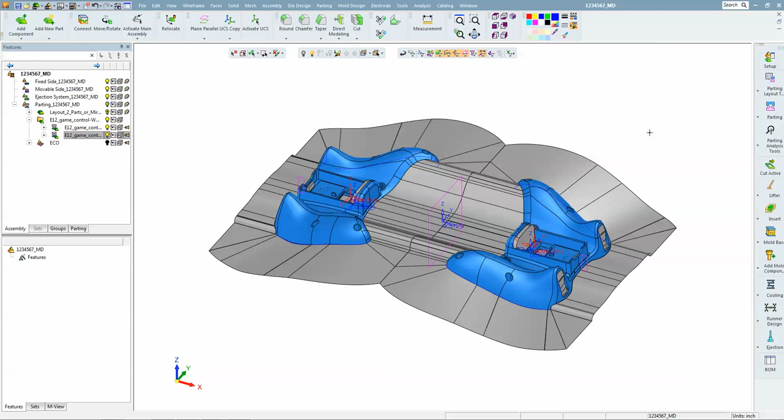Okay, in the last video we did quick split on these parts and we developed the shutoffs.

Now we're ready to add a mold base and some inserts. So we're going to go to mold design and choose new mold base.

I'm going to set the directory here, what catalog I want to use. Alright, we're going to do PCS.

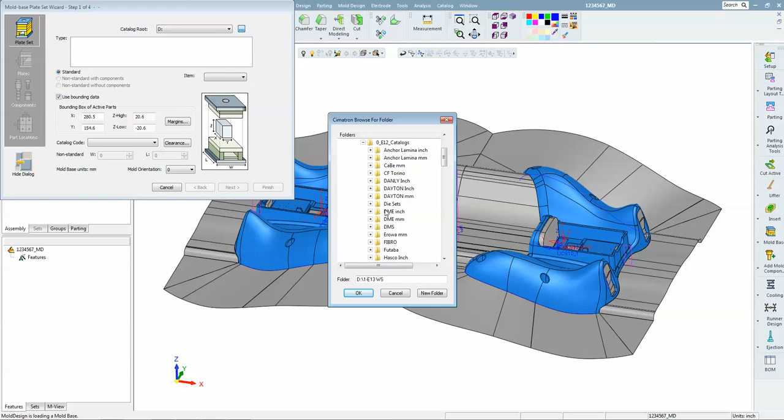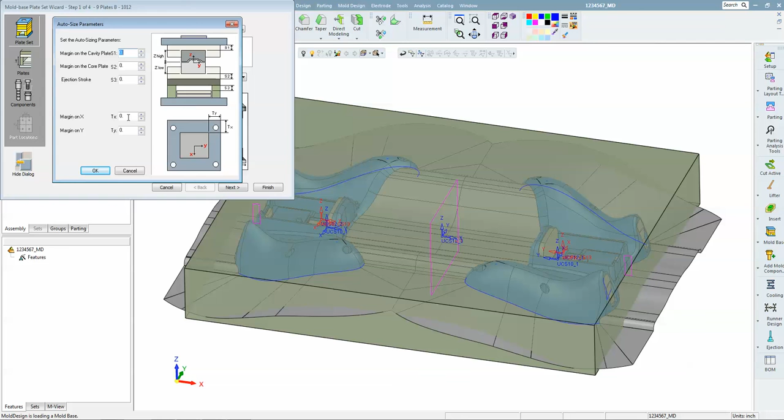And because we're going to use inserts, we'll use the 9-plate configuration. We can set up margins in here if we want. The software can suggest a mold size based on the amount of steel. I happen to know that 13 by 18 works good in this one. We can go to the top view to get a feel for that size.

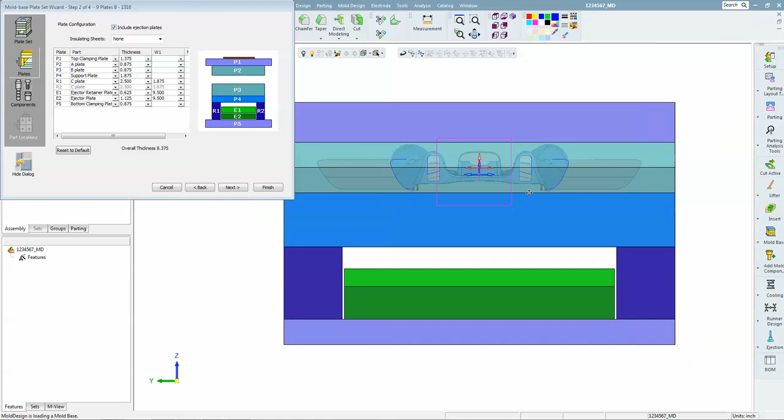And we're going to go to the next page, and we're going to set the thickness of the plates. Okay, so we're going to use a 2 3/8 A plate, 2 3/8 B plate. We can increase the ejector stroke if we want to, and go ahead and take that.

We're going to take all the components, and the system is now building the mold base, putting all the appropriate components into the appropriate sub-assembly, which is a very, very nice feature.

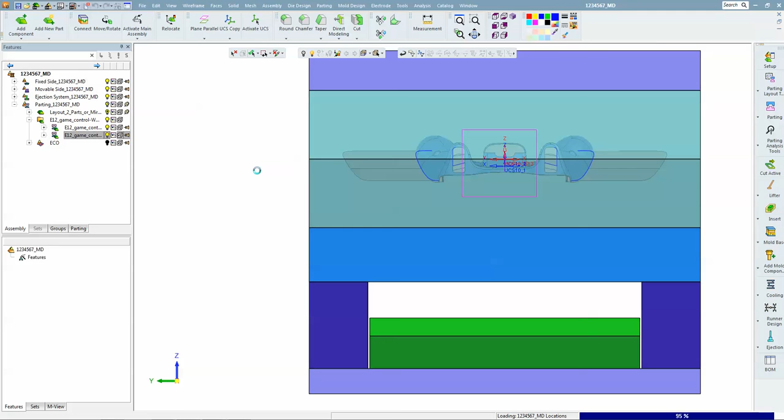Okay, so now I can easily turn off the A side, and I'm going to temporarily hide the B plate. We're going to activate the movable side, and we're going to choose

Add component. And then we're going to go into my catalog and go to the insert folder. And I've got some inserts.

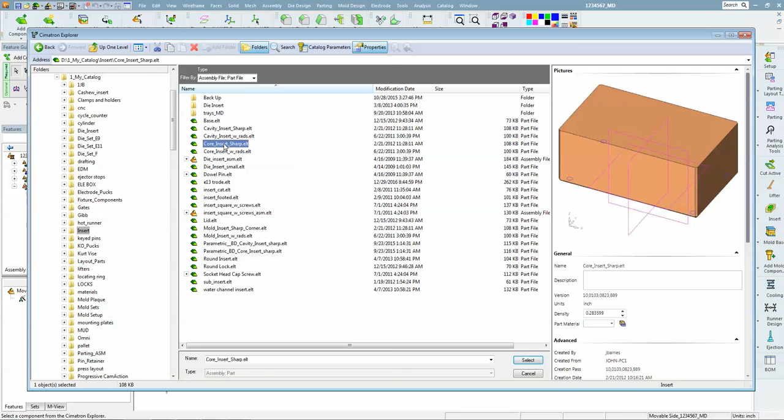I got a core insert with sharp edges, which would assume that we're wire burning the pocket out, or a core insert with radiuses, assuming we're going to machine the pocket out. We'll take this one.

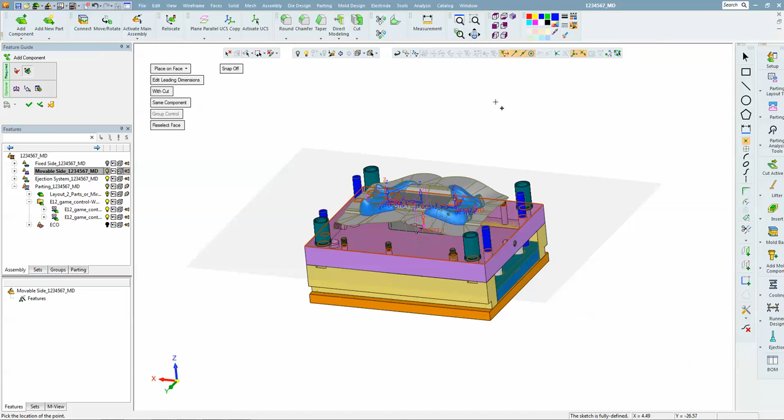We're going to place it on the face of the support plate on center. And we're going to change the leading dimensions.

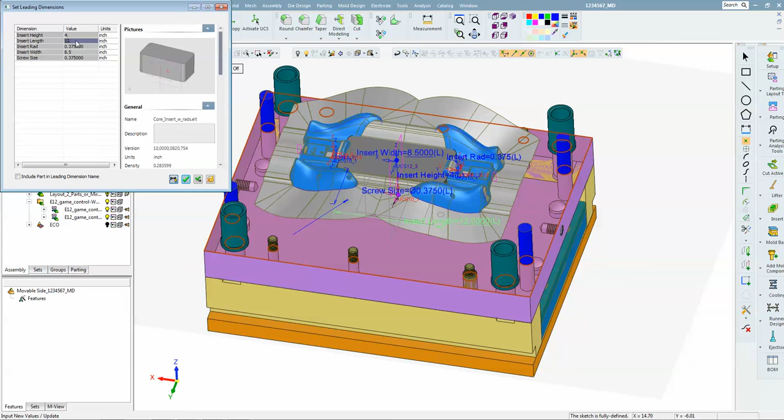So I want to have 4 inches in the height, 9 inches in the length. Actually, no, I think I want 8.5 there. And, well, I don't remember. We're going to have to go to the top view and take a look at it.

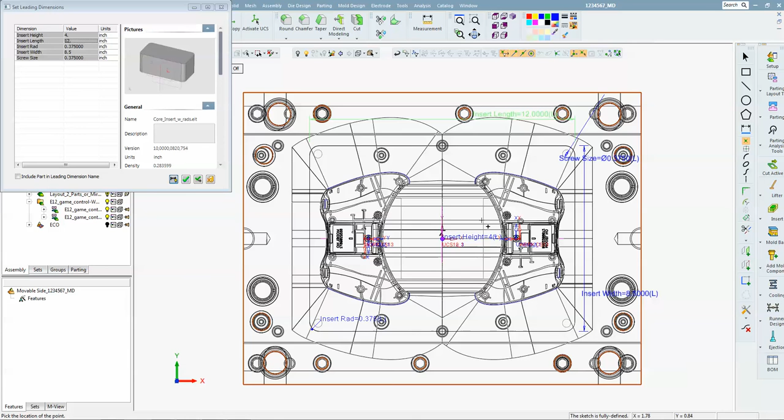Okay. Yeah, it's actually not too bad. So we'll go ahead and accept that.

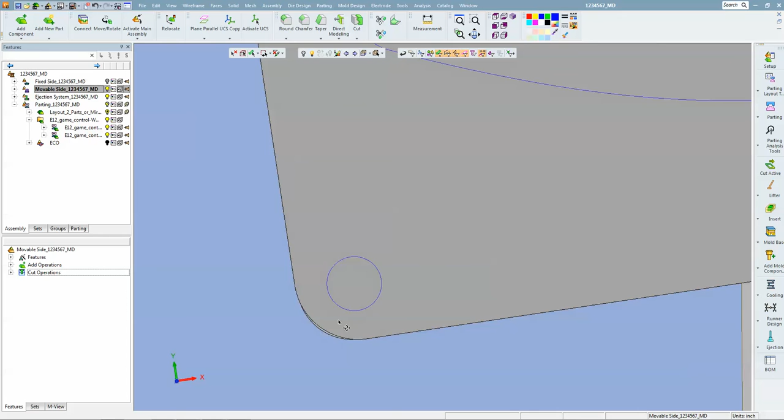And we're placing it with cut. There's a cut body in that insert folder. And if we show the B plate, we should see that the corner is actually cleared with the cut object.

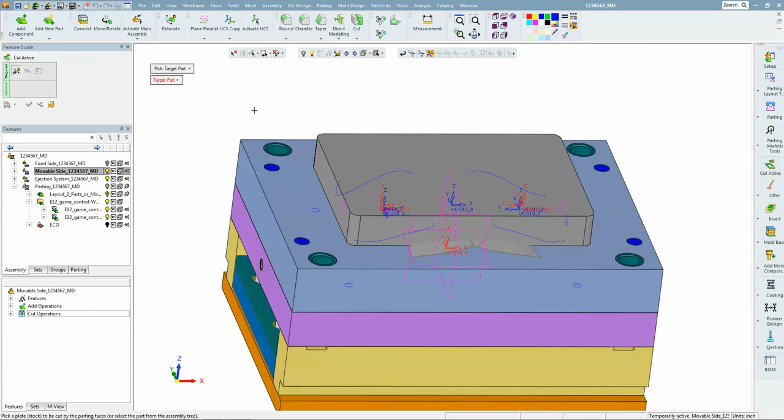Okay, so now we're ready to cut the core insert with the core faces and the core parting faces. So if we do that over here with cut active, we pick the target part. It's asking us to pick the split directions, being one of these guys and one of those guys. And because we assign parting attributes, it knows what parting faces are associated with those quick split groups. So we have nothing more to do than hit the check mark.

This cut operation takes a few seconds because it's essentially doing a lot of unstitch and restitch operations, because we never really unstitched the model. The model is still one solid object in reality, but the software treats it a different way during the cut operations.

The other nice thing about this operation is that it retains all of the colors properly. A lot of systems that just do a boolean cut, the result is one color where you can't really differentiate between what's shut off and what's part.

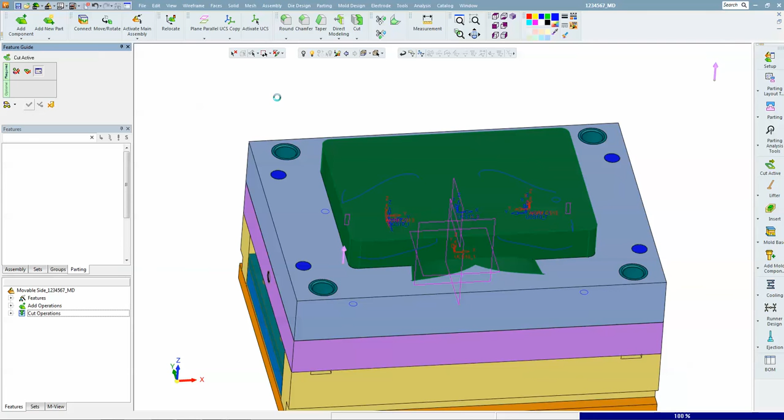Okay, so now if we hide our parting assembly, this is the actual core, and as you can see, all the parting faces have a unique color from the actual part area.

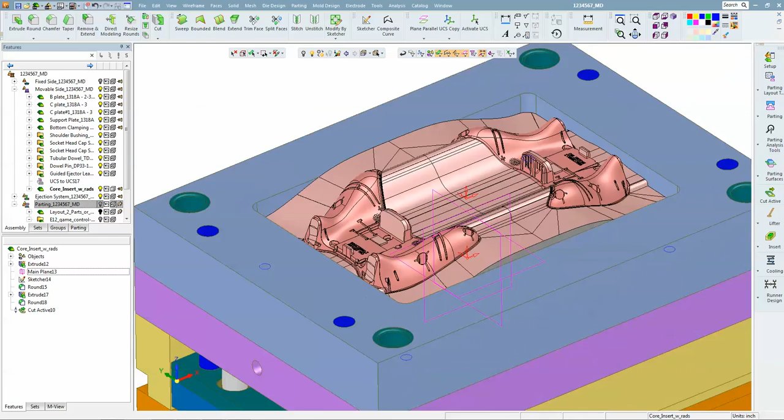Okay, so let's see, what do we want to do next? Probably adding some ejector pins would be a good thing to do next.

So let's activate the ejection side, and we're going to choose add ejector. And I've got a PCS catalog, and let's take the diameter of 188.

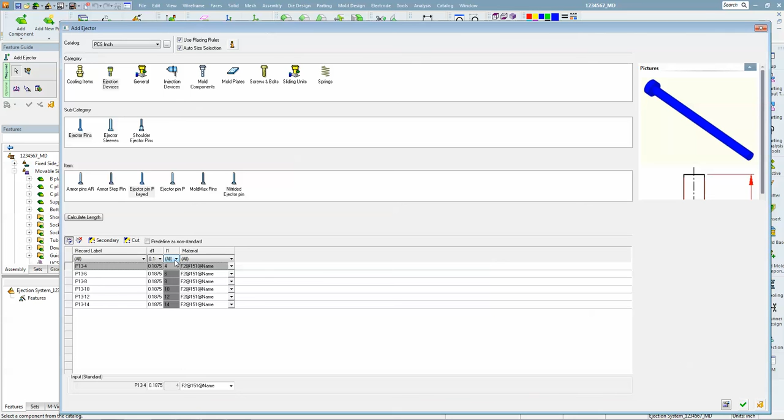You'll notice the length is kind of grayed out. That's for a specific reason. Basically, wherever we position the pin, it's going to pull the right length of pin from the catalog based on the catalog lengths.

Probably it would be a good idea here to do symmetry. Oops, that's not it. Okay, and I can do one axis or two axis by a point. We'll go to the top view and do two axis by a point.

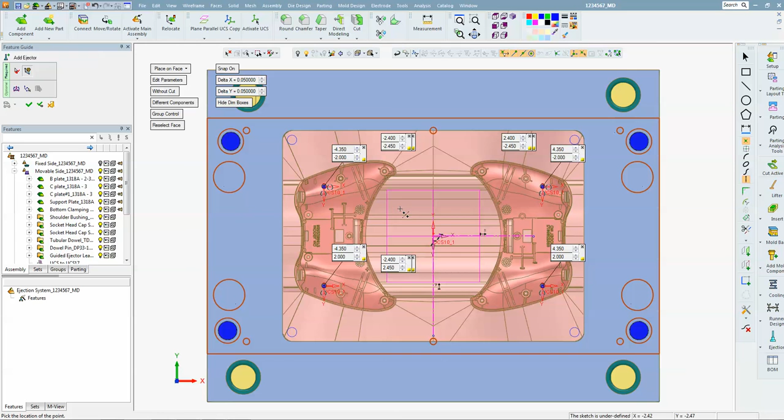One over here. So you get the idea. We place one and we get four. Let's do one over here.

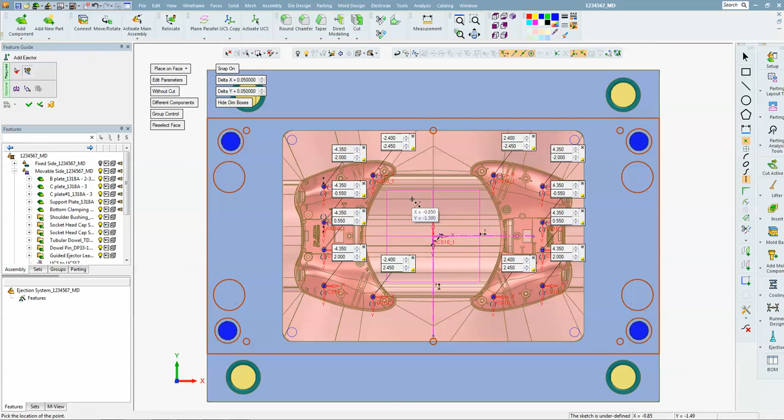And just to really show some more functionality, let's go to wireframe for a second, and we'll see that all the keyed pins are facing to the left. Having been a mold maker for a while, I know that some shops prefer the key always face the center.

So we're going to pick on individual control and pick these guys on the left, and we're going to spin those in Z180. That'll get the flats facing the center.

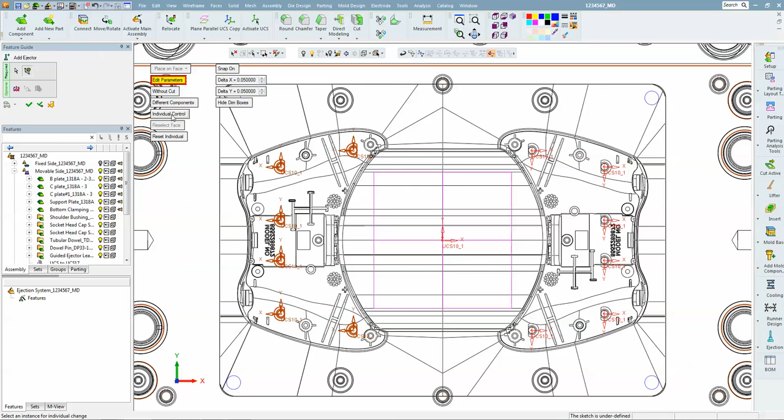Okay, and then we go back to group control, and we do individual control once more. And let's see if we can make this one pin different.

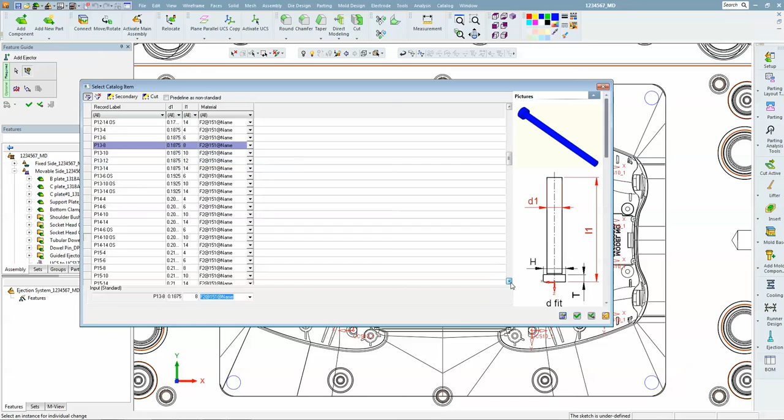So I'm going to make this one a 1/4 inch. Okay, and just like that, I've made that one pin a 1/4 inch pin, while the rest of them are 3/16. Pretty wild. And so we're going to place that without cut.

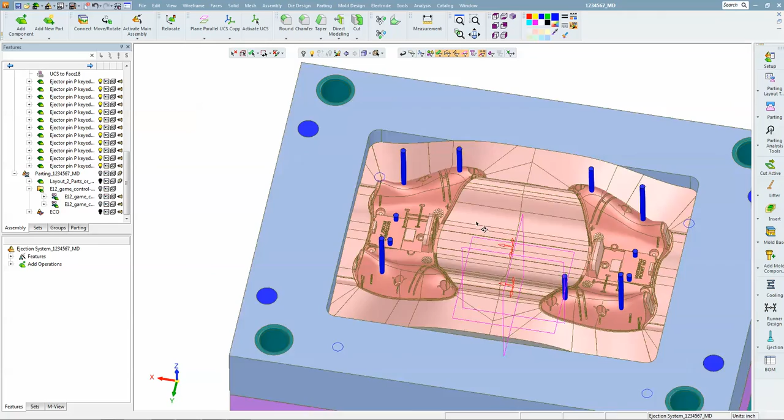For whatever reason, that pin didn't come out long enough. I've not actually done this before, so I don't quite know why, but we can fix that easily enough. Let's hide a couple things here.

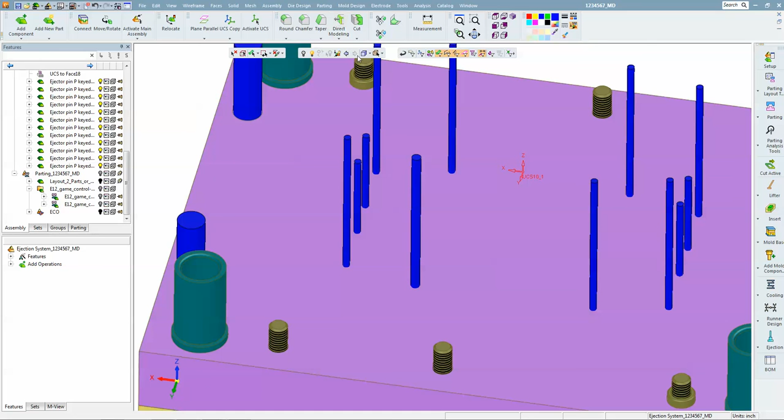I'm going to double click on that pin and pull the catalog length. Okay, so now it's an 8-inch long pin, and I can go back here in my previous display states.

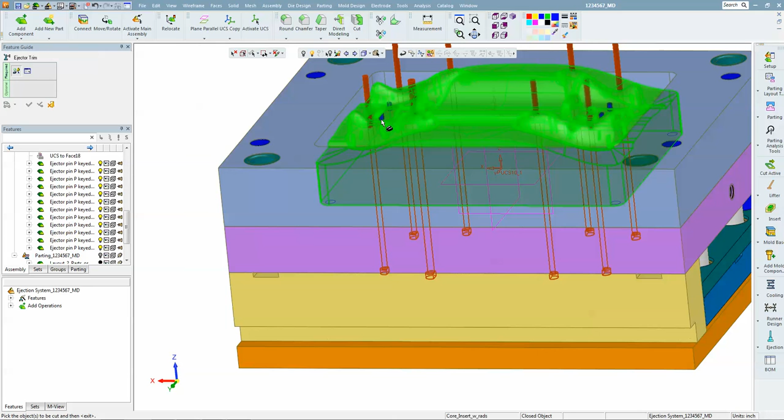Now we're going to do ejector trim, which will cut off the tops of the pins, and we're going to trim by the movable side. We can do a shape trim, a flat trim, and we could do a flat trim to the highest point, the lowest point, or the midway point between the shape. But we're going to do a shape trim with an offset of 15 thousandths just to help guide the part out.

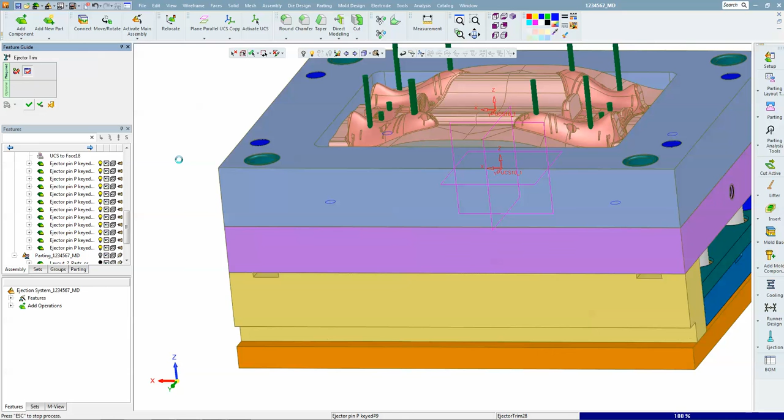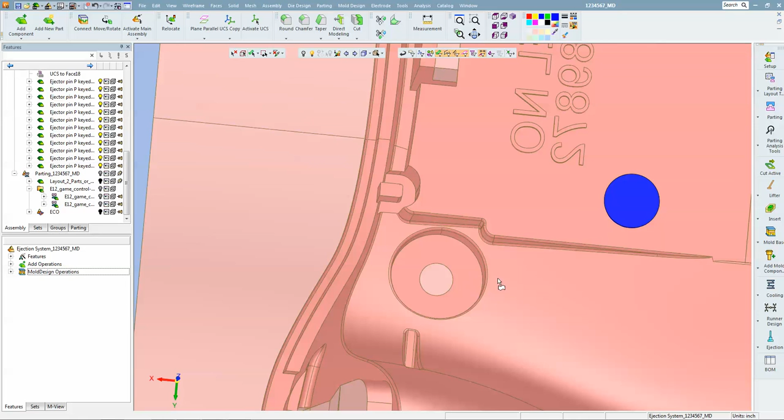I realize now that I picked kind of simple areas. I have placed one of these pins before so that it straddled all these surfaces, and it's not a problem to trim over an area like that. It doesn't have to be a simple scenario where the pin breaks through. It really works well. There we can see all the pins are proud at 15 thousandths.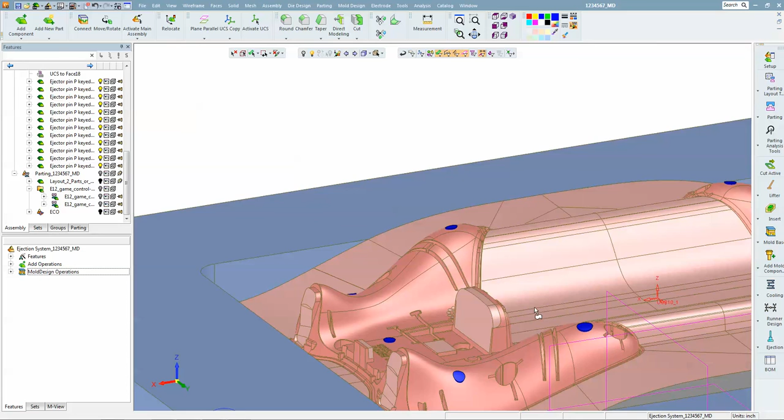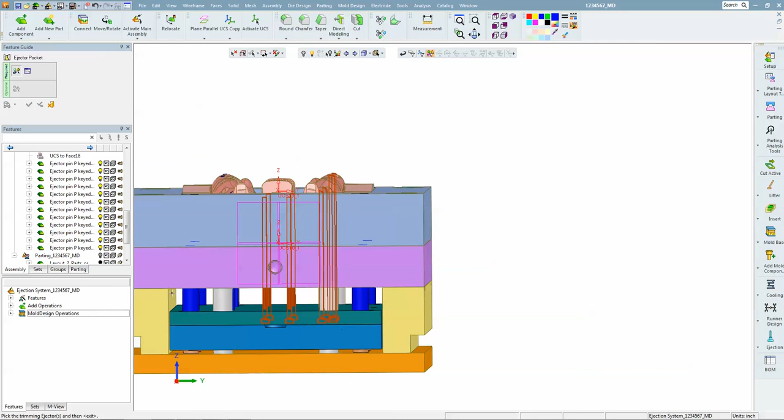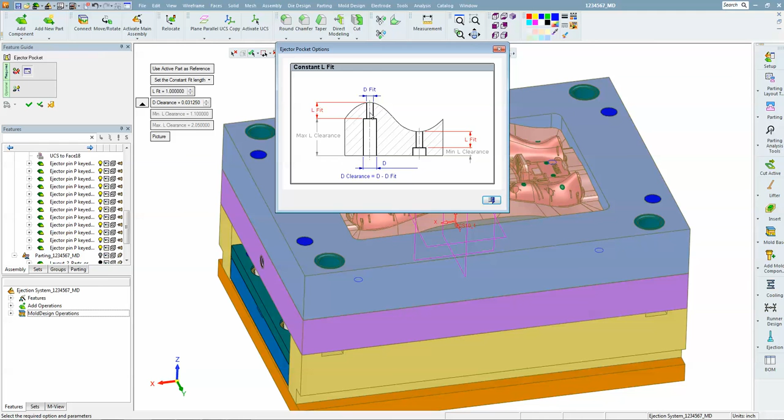So now we're going to do ejector pocket. We've selected all the ejector pins, and we're going to set the constant fit length. So if we look at the picture here, we're asking for the same length of land around each pin. Let's say that was 3/4 of an inch, and then we're going to clear below that.

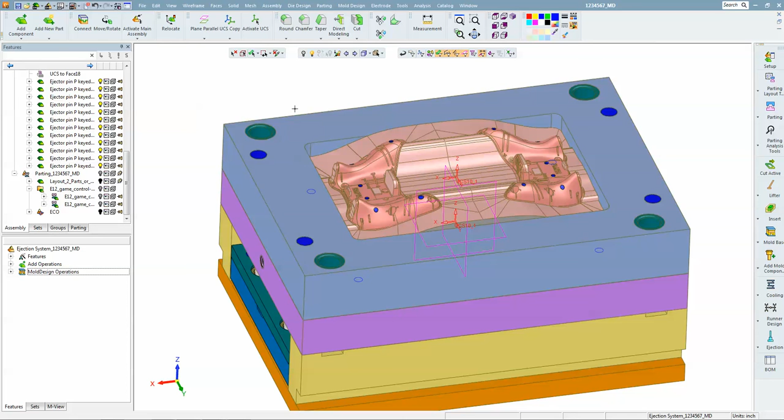The diametric clearance value is 1/32, the length of the land is going to be 750, and do it. Okay, so now we can see that we've got 3/4 of an inch of land around each pin.

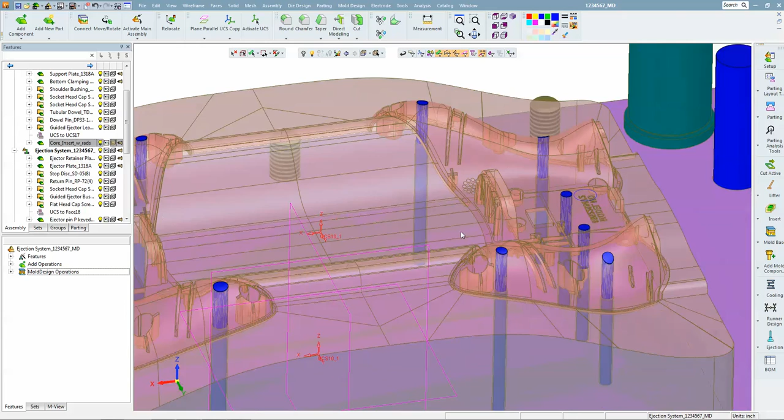Obviously, that can be a pain for the guy programming them if he's not using some automated drilling like Cimatron offers. With our automated drilling, the software works off the solid model, and it knows what depth to drill each hole based on the model.

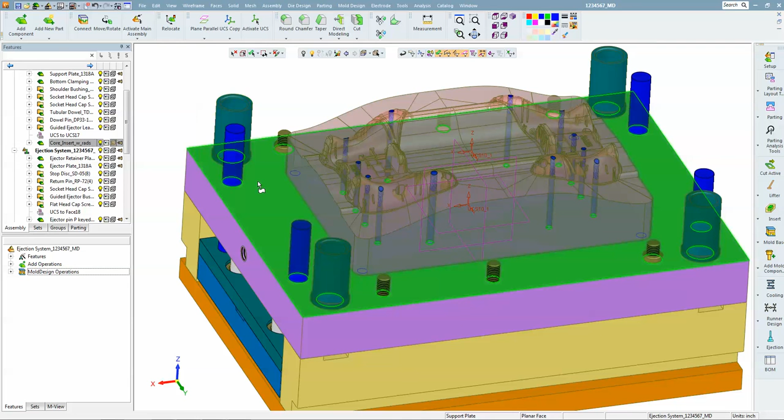Let's keep looking here. We want to turn off this one, and this one, and this one. And now we can see the keyed pin pockets. Again, remember, this pin was a bigger diameter than the rest.

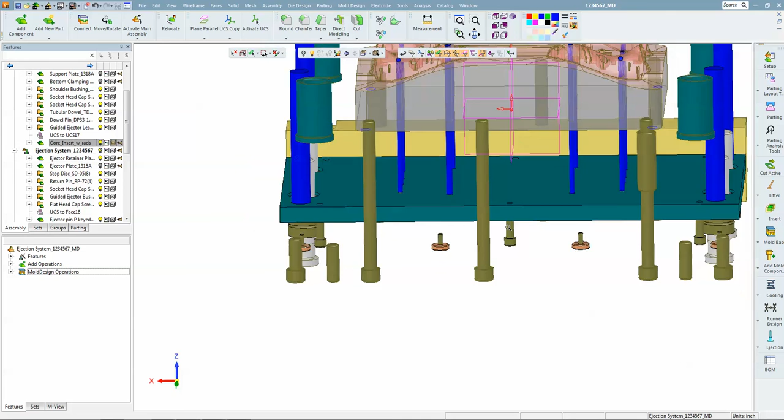Now let's add some water. So we're going to activate the appropriate subassembly, being the movable side, and we'll choose cooling plane parallel, and we'll come up from this face. Let's see what 1 inch looks like. That looks good.

And then we're going to sketch the cooling lines. Let's add some reference to these edges. So we're going to sketch like this, and like this, and then dimension.

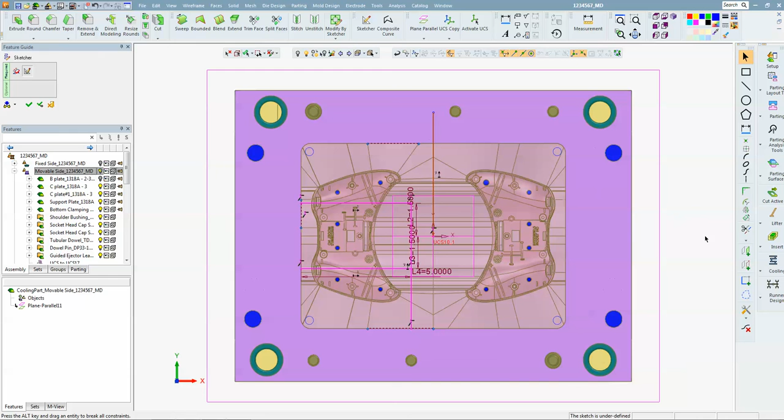Right, and then we're going to give ourselves a line to mirror across. We can change that line to a construction line easily. And then we're going to mirror these guys across this line. And then we're going to choose the cooling objects.

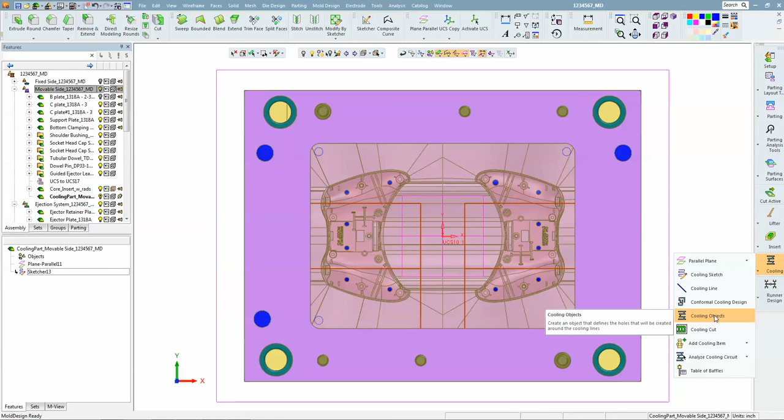Okay, so there's a 7/16 water circuit, and we'd like to know how close are we to our ejector pins. So we can do a visual analysis and check and see, are we within a 1/4 inch of hitting something. At a 1/4 inch offset, we're hitting that pin, so we know we don't have a 1/4 inch of meat there between the pin and the water line.

So how about 1/8 of an inch? We're at least 1/8 of an inch away, but if that's too close for comfort, we can come back and change those values, obviously. So let's go ahead and take it for now, and we'll do it with cut.

And then we can obviously edit the sketch, and we could make this 1.375.

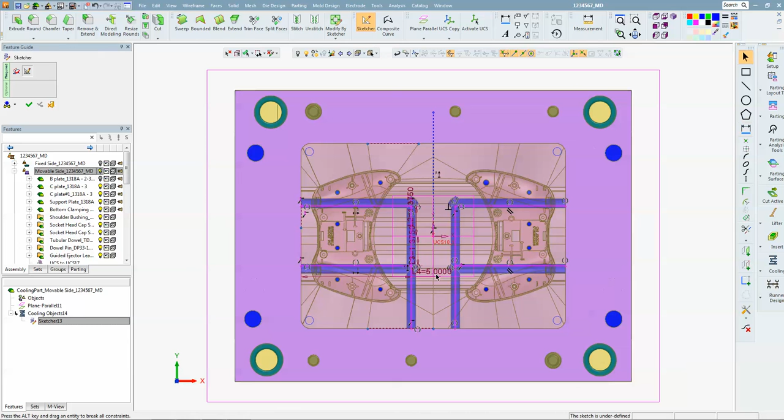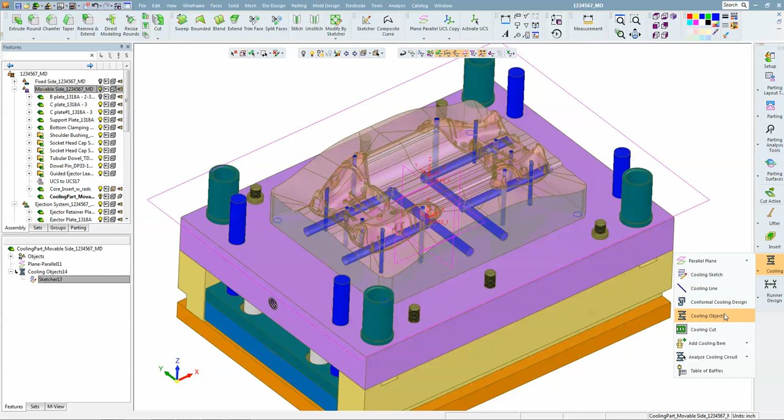Okay, so now we want to add some fittings. So we'll do a cooling item. Now, I normally take the DME extension plugs. We may end up doing that, but let's just see what happens with the PCS ones.

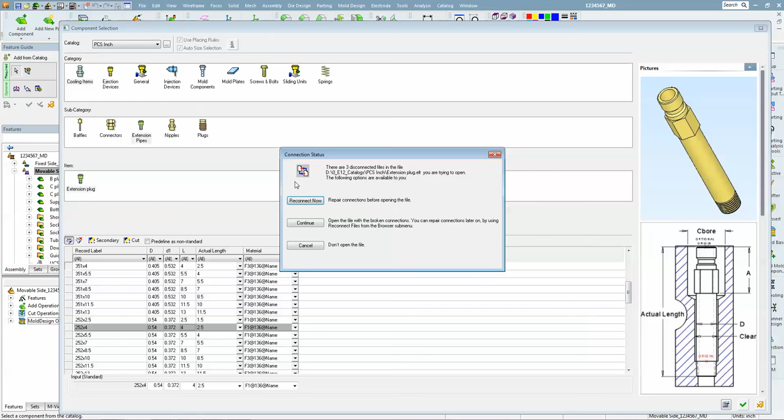And a lot of times when we place components, we place it on a face. If I pick this face, I can only place 2 components. Cimatron has the ability to place on a cone face, which will let me go all the way around a block. Oops, that's a bad pick.

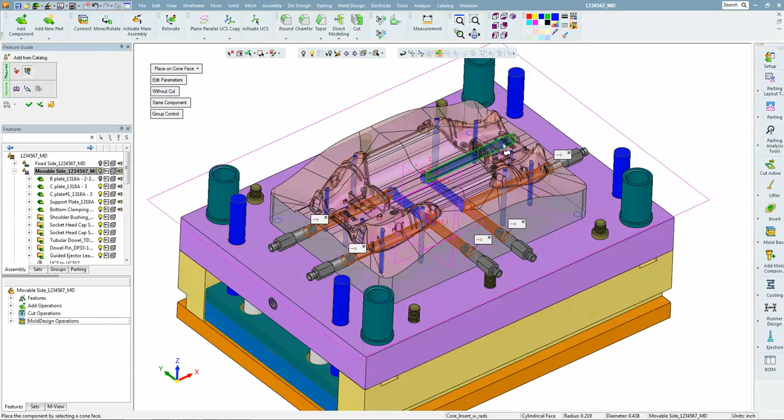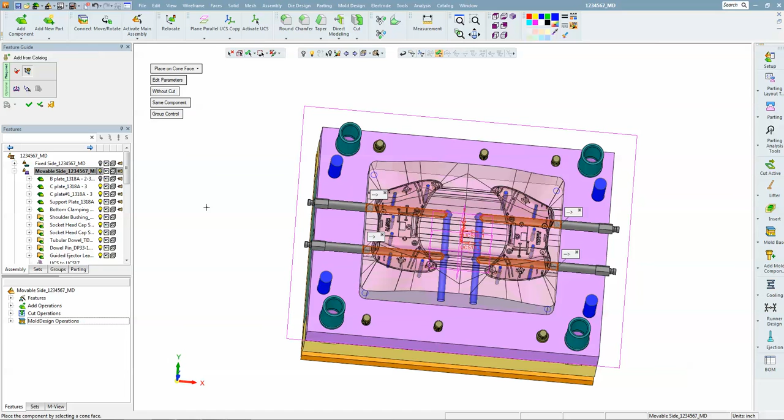Now, obviously we don't need these ones, those will just be plugs, so I wanted to demonstrate that. And I can see those aren't long enough, so let's take a longer one. Okay, that's not too bad. Let's see how this one works. We're going to place it with cut and see what we get.

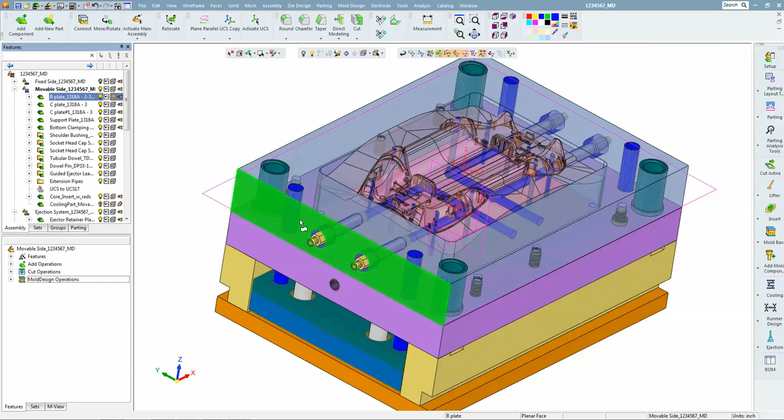Okay, so let's turn on our B plate, and we can see that the B plate has got a cut, and it put clearance over here. Well, let's say we didn't like the clearance.

Let's measure that diameter. So that diameter is 1 inch. That's not too bad. I know that some other catalogs will make that diameter 875, which is always too small. But let's say that our company standard was to make that 1 1/8 inch. Obviously we can do a face offset, but I want to show that during the add of these components,

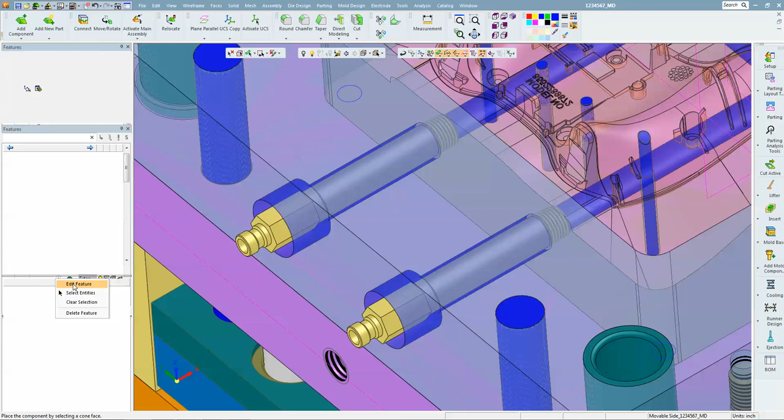we have access to all of that information. So if I look at the edit parameters, we can look at the cut values, and we want to find that 1 inch diameter, which is right here, and let's make that 1.125. And let's back the length off a little bit. Let's go 5 1/4 on the length.

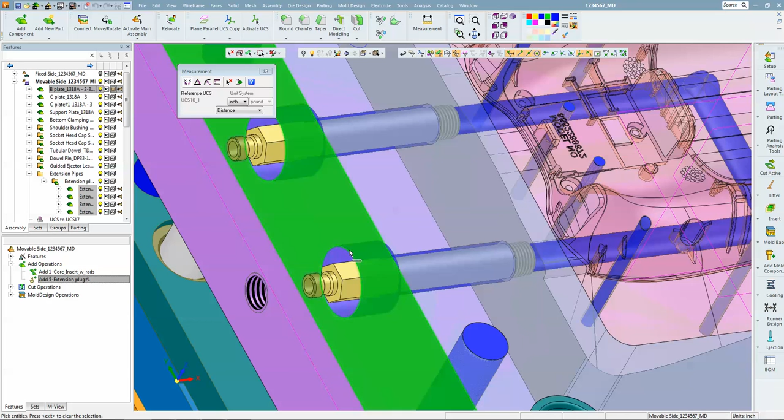Okay, so now this diameter should be bigger. We got the 1 1/8 that we asked for. But I'm not sure that length worked out like I expected. Let's edit that and look at it once more.

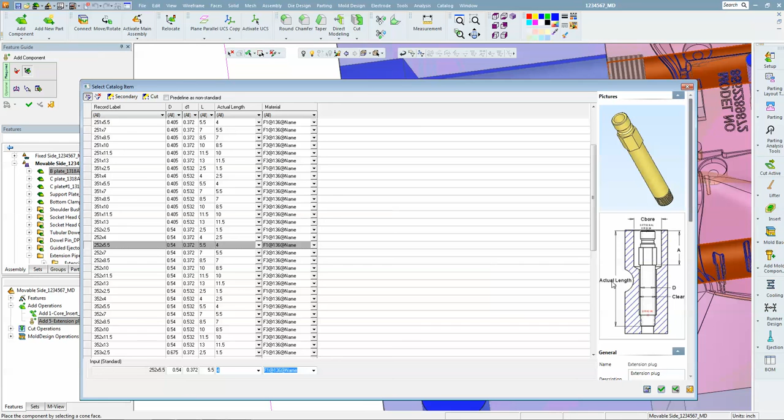You might need to look at this picture. We got an actual length. We got a L value.

Alright, let's try changing this. Actual length. Let's see if 3.75 changes that.

Well, I think I'm doing something wrong, but I know you can type this in and get a different length.

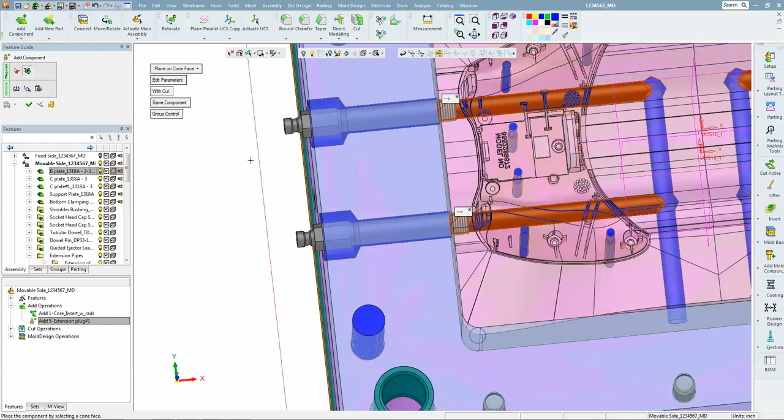Yeah, I apologize. I'm not able to get that changed, but trust me, it works. It's clearly operator error.

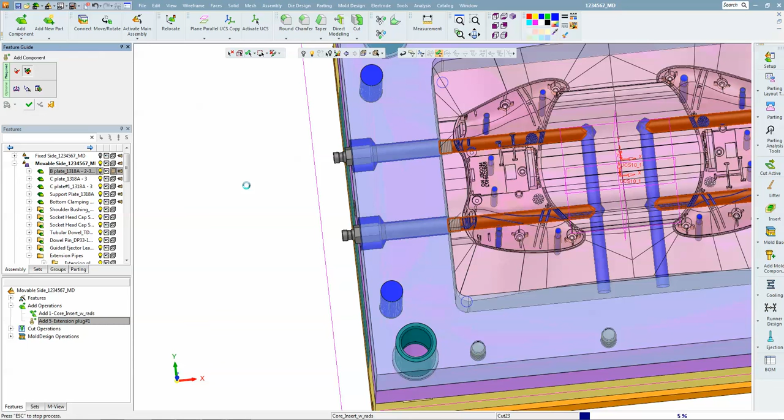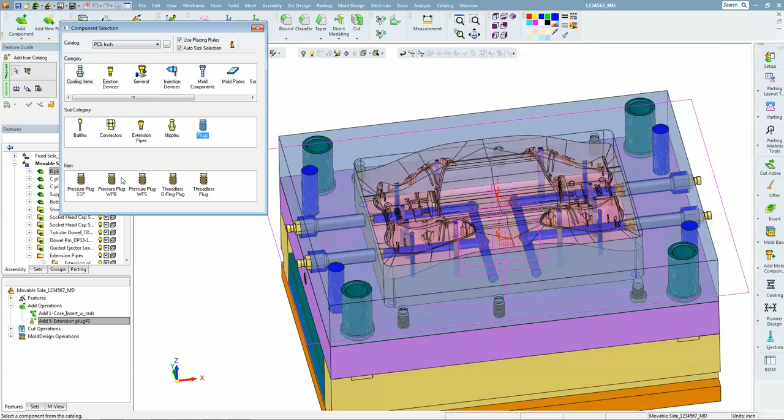Okay, so now let's add the plugs that go here. And we're going to place on cone face.

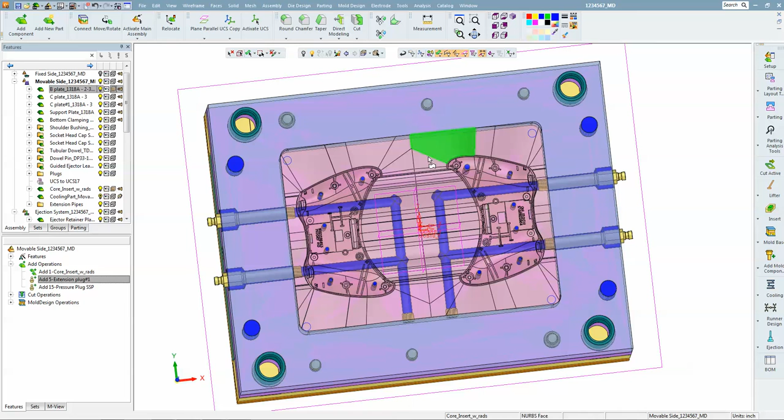Alright. And let's see, we'll do the runner next. So the runner tool is a lot like the cooling circuit. It wants us to pick a plane.

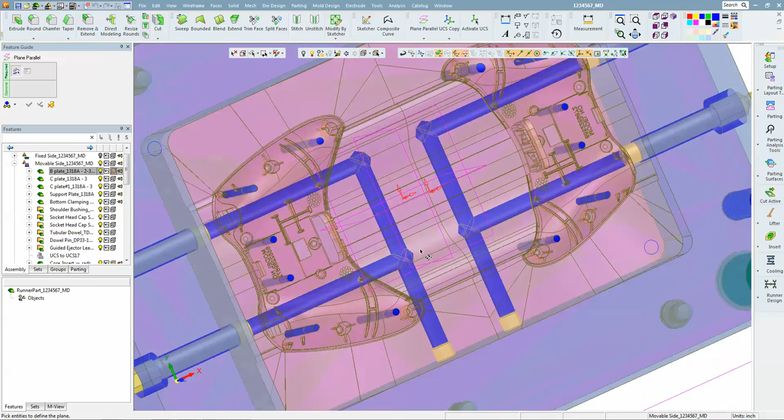Okay, so this isn't flat, obviously. That's alright. So I think we want to create a plane there first.

So let's do wireframe, plane.

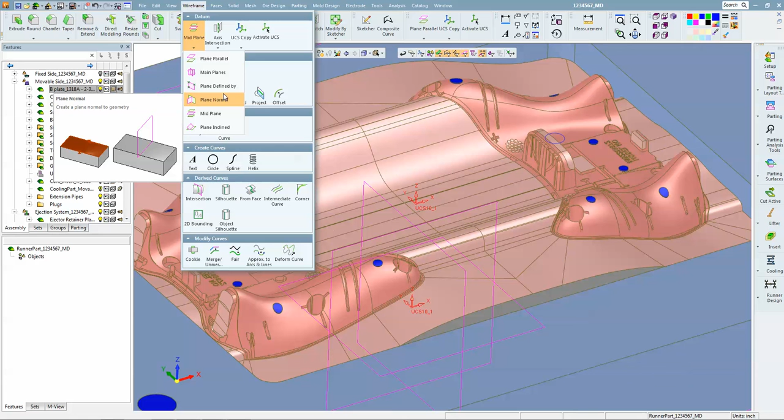So here it tells me the plane isn't 2D, but do I want to create a plane that lies approximately on this face? And I'll say yes.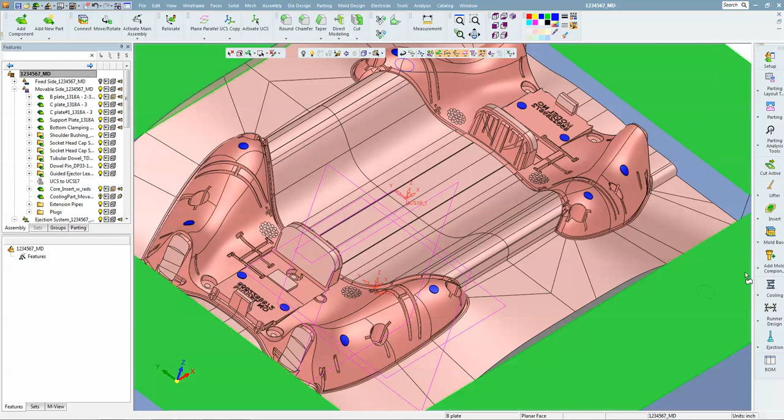And now we can create the other plane by doing runner design, parallel plane. We'll pick that one that we just made, and we're going to do a 0 offset. And by creating that, it creates a part here called the runner part.

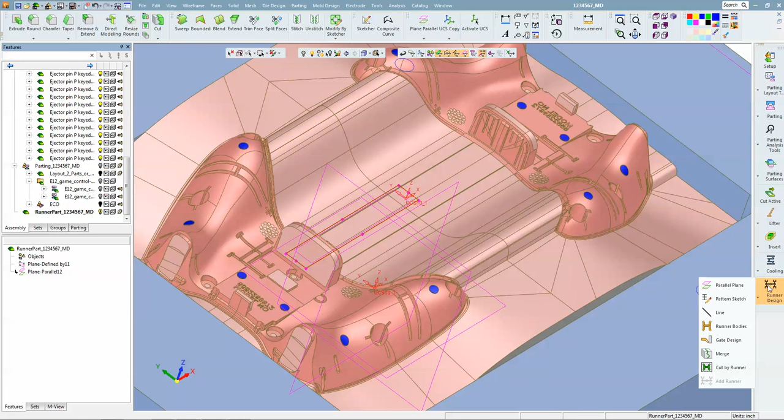And from here, we're going to do a pattern sketch and go to the top view. And we're going to create a line like this. And dimension it.

And then we're gonna, well, actually, let's edit that. I want to change that. It would be better if I had some cross lines here to really kind of show it a little bit better. So I'm going to create a secondary runner like this, and we'll even come in maybe like that,

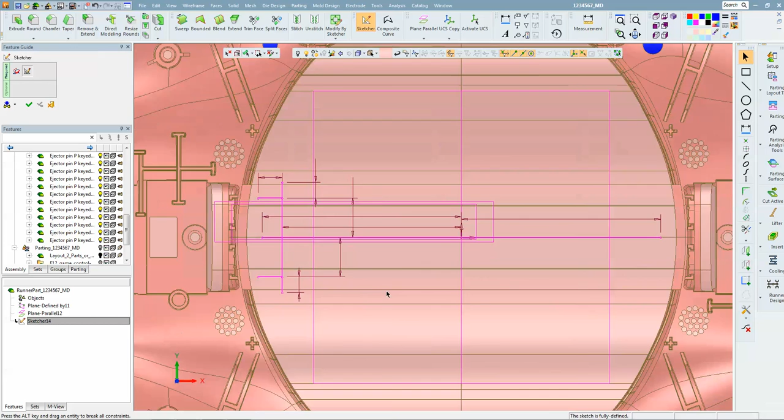And we want to mirror all this stuff across. Alright, let's see what we get with this.

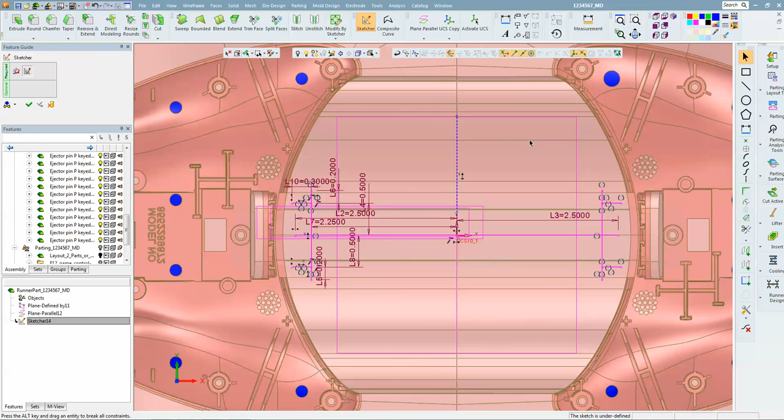Okay, so now we're going to do the runner bodies. And we're going to do circular. We'll do 312.

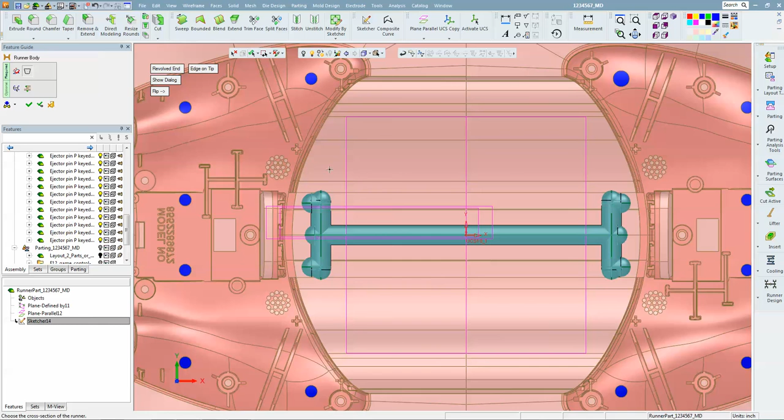Ah, I see something new. In version 13, we have an automatic cold slug well, so I didn't have to even draw those on.

But we want to change this one to be a quarter.

And then this one will be 188.

Seeing though that took a little while, I'm going to be lazy and we'll just cut this and mirror it. So let's call that good for now.

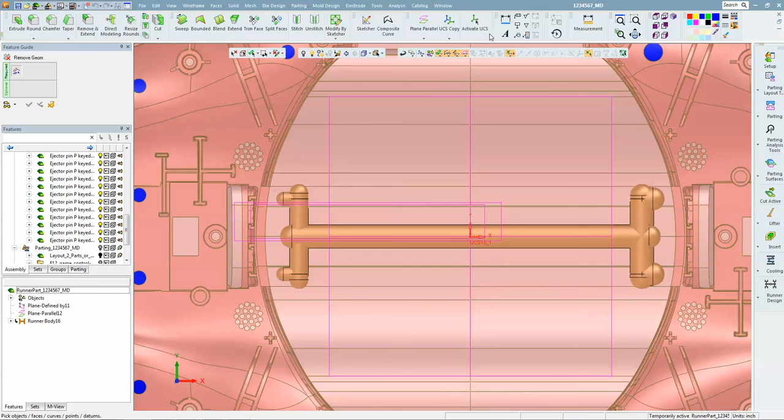Let's do remove geometry, and I'll pick these as solid bodies. And we'll do the old edit, copy, mirror. Mirror that across this plane.

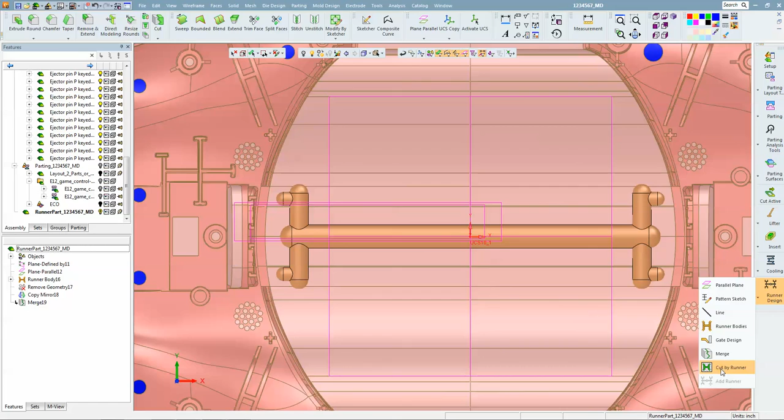Okay, then we have a merge. And then we have a cut. So obviously we want to cut this one.

Now we haven't actually created the insert for the cavity side yet, so we'll just have to pretend that that's done. And this cut would actually cut the core insert and the cavity insert at the same time.

Here's something else. It looks like this is going to leave behind a runner body curve, which is going to be very useful for the NC guy.

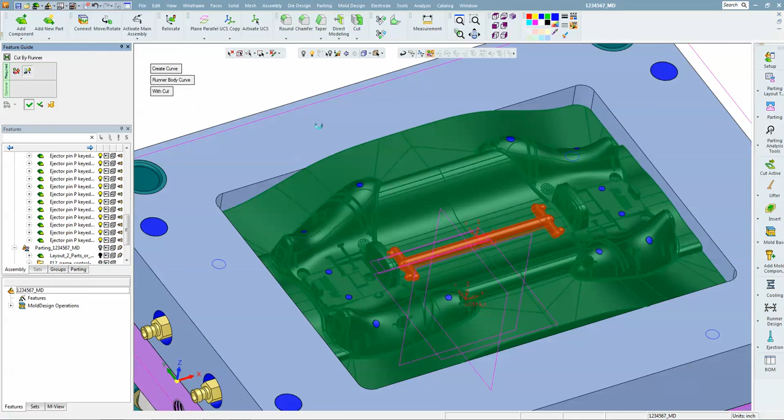Okay, so now we're going to hide the runner part. And we see that we got the runner left.

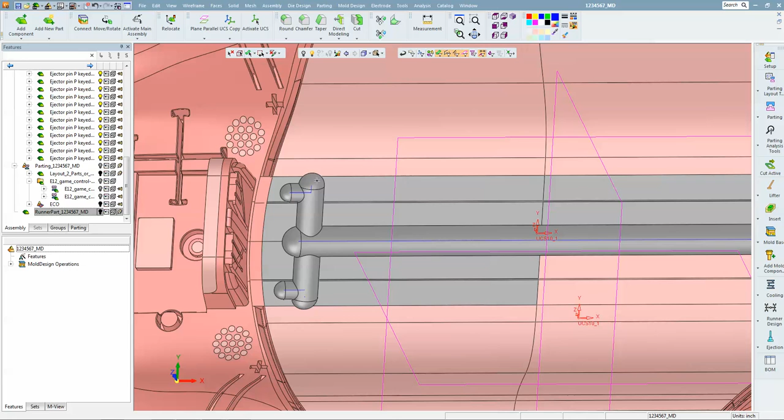Yeah, looks like it got a little confused on the curves, probably because I did the cold slug wells manually, and it now has a feature to include those automatically. So probably that's the better way to go about it.

So that's a lot of the tools for the mold design. You can get quite a far ways in a short amount of time. Adding a lifter is easy.

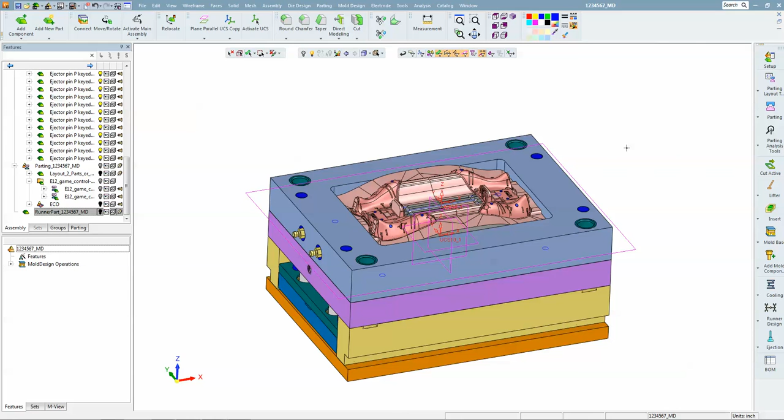There's a lot more things that we can show. I'll probably do another video to show maybe adding a lifter. Thanks for watching.